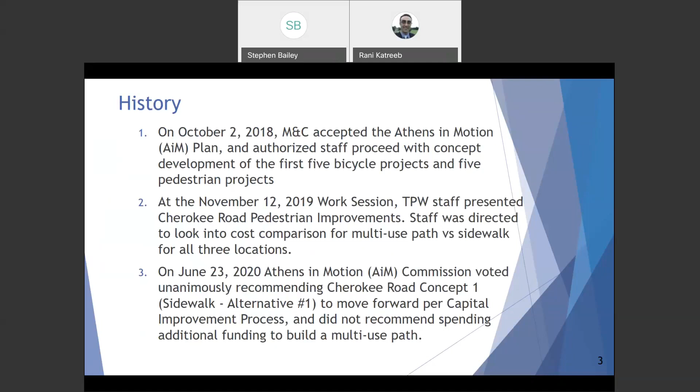We were excited to see Cherokee go through our newly updated public engagement process, including an initial public forum and an on-site walk audit, which one of our commissioners, Commissioner Davenport, joined us for. Comments at the audit echoed the recommendation for a sidewalk as opposed to a multi-use path. We're currently in our next phase of public input, and we ask that you please take the time after watching this presentation to fill out the survey link on the last slide.

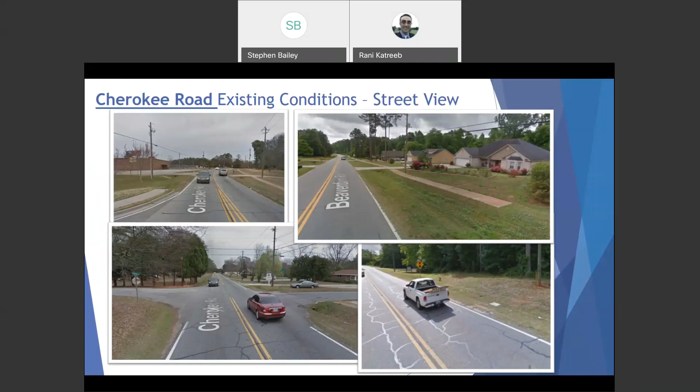Now I'm going to turn it over to Ronnie, who will talk you through the specifics of the Cherokee Road project and explain the next steps.

Thank you, Stephen, for the intro. Our Cherokee Road project is starting at a driveway of Lowe's on Cherokee Road.

There is an existing sidewalk, as you see on the top left corner. We're tying to this sidewalk, going on the left-hand side with the sidewalk proposed, and on the lower left-hand side, the screen here showing Airport Road and Morning View Drive intersection.

At this intersection, the sidewalk moves over to the right-hand side of the road as you travel towards Winterville. As part of this project, we're also tying to an existing sidewalk on Beaver Dam Road, about 200 feet from the intersection of Beaver Dam and Cherokee Road.

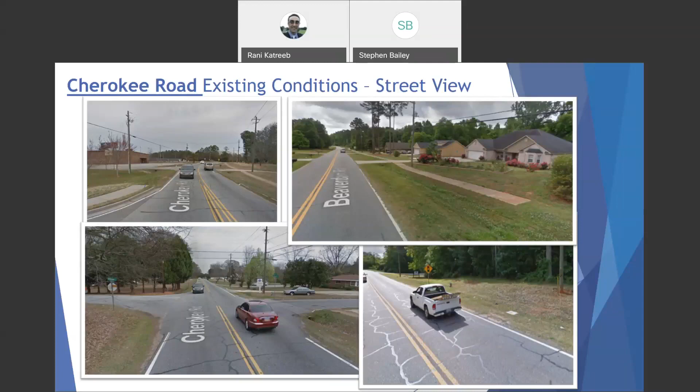Our sidewalk alternative and alignment starts, as I mentioned, at the project beginning point at Lowe's driveway, and it extends about 4,050 feet with graded ditches between the sidewalk and existing infrastructures and houses. A 5-foot sidewalk begins from the existing sidewalk

and adjacent to Satterfield Park all the way to Airport Road. At Airport Road and Morning View Drive, the sidewalk shifts to the south side of Cherokee Road, and it extends along Cherokee Road to Beaver Dam Road by the Christian Way intersection.

As I mentioned, a 5-foot sidewalk is proposed for approximately 200 feet from said intersection, and ties with the existing sidewalk on Beaver Dam Road.

Rectangular rapid flashing beacons are to be considered across Cherokee Road, Airport Road, Candler Road, and Cherokee Road extension. These proposals are pending warrant studies that will begin after concept approval. Accessibility ramps, crosswalks, and signal improvements are proposed at Cherokee Road and Beaver Dam Road by the Christian Way intersection.

Three different sidewalk alternatives have been developed with cost estimates ranging between $818,000 to $1,069,000.

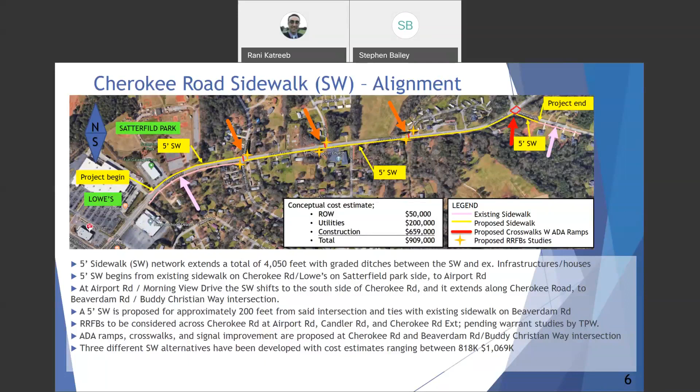The preferred alternative calls for an urban shoulder with a curb and gutter, continuing all the way up to Morning View Drive, and at Morning View Drive, where the sidewalk veers off to the right of the road, traveling northeast, this section would be a rural section or shoulder with a sidewalk, with a 5-foot sidewalk all the way up to Beaver Dam Road.

The advantages for this alternative: it reduces impact to adjacent properties, utilities, trees, and environmentally sensitive areas, and this feature is only limited to locations with curb and gutter. Curb and gutter is a traffic calming measure. It also maintains the current urban versus rural transition between commercial and residential properties at Airport Road and Morning View Drive. Disadvantages: the sidewalk location with respect to the edge of the roadway will vary, and it does not accommodate bicycle traffic either.

At the Temple Baptist Church, we are proposing to use an urban shoulder if needed to preserve the existing parking spaces on the church property. And the cost is shown here for this concept.

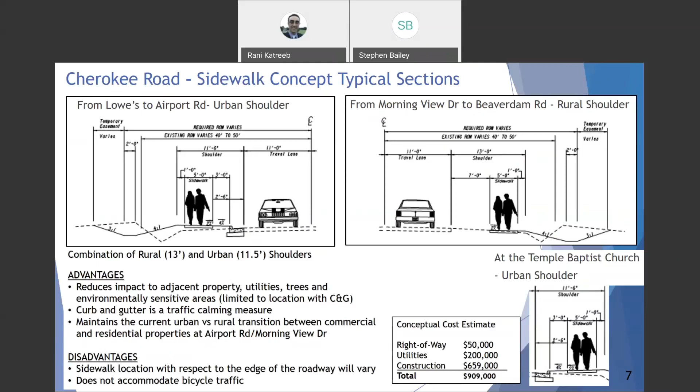The Cherokee Road multi-use path alternative alignment starts from the same location; however, it starts on the other side of the road. It's a 10-foot multi-use path network that extends about 4,050 feet along Cherokee Road. The multi-use path begins from U-Haul or You Pro Self Storage location across from Lowe's driveway and ends at Beaver Dam Road.

By Christian Way intersection, in the multi-use path, we also proposed a 5-foot sidewalk for approximately 200 feet from said intersection to tie with the existing sidewalk on Beaver Dam Road.

Rectangular rapid flashing beacons are considered also on the multi-use path, and they will all be pending warrant studies to begin after concept approval. The multi-use path also includes ramp improvements, crosswalks, and signal improvement at the intersection of Cherokee Road and Beaver Dam Road by Christian Way.

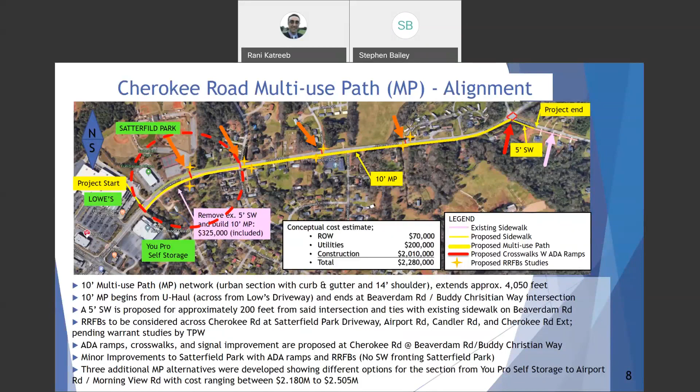The Cherokee Road multi-use path typical section consists of a 10-foot multi-use path within a 14-foot shoulder. This is an urban shoulder section with 30-inch curb and gutter. Advantages: curb and gutter is a traffic calming measure, it improves stormwater drainage, retaining walls will reduce impact to property, and it accommodates bicycle traffic.

Disadvantages: the multi-use path requires costly stormwater system upgrades, requires retaining walls, and has a high cost when compared with sidewalk cost.

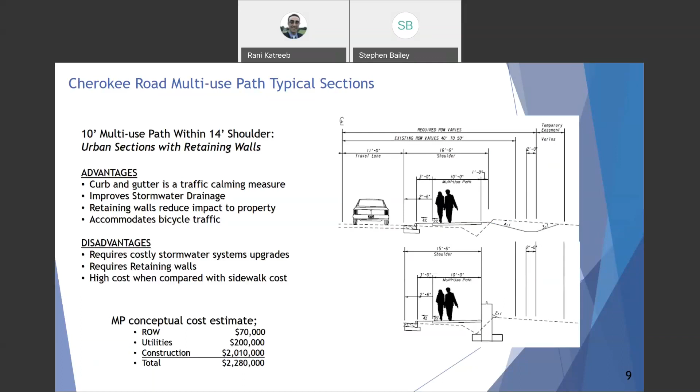Cherokee Road improvements next steps: our public engagement is ongoing, started on August 11, and it will go through August 26, 2020. The presentation you see today should be available by August 20th or earlier. Concept agenda setting for review by Athens-Clarke County Mayor and Commission is scheduled for August 18. Concept agenda and regular business session will be considered for approval by Athens-Clarke County Mayor and Commission on September 1st. I'll turn it over to Stephen to talk more about how you can provide us your feedback.